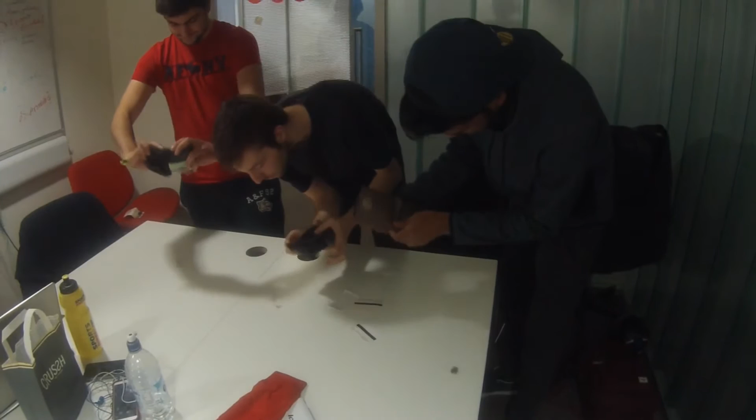Are you worried about global warming? Concerned about power outages? Struggling to pay bills? Or do you just like staring at spinning things? Nine Wind has the right solution for you.

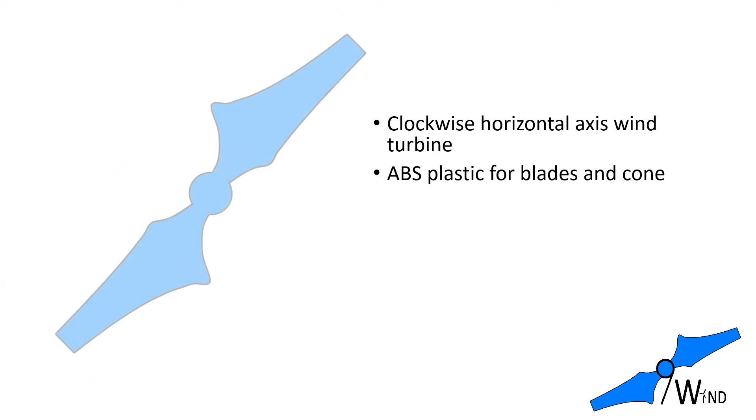Our company designs and manufactures excellent quality small horizontal axis wind turbines with very particular design limits. The turbine is made out of ABS plastic for blades and cone and aluminium for the hub. It rotates clockwise, its diameter cannot exceed 400 mm and the mass is kept below 400 grams.

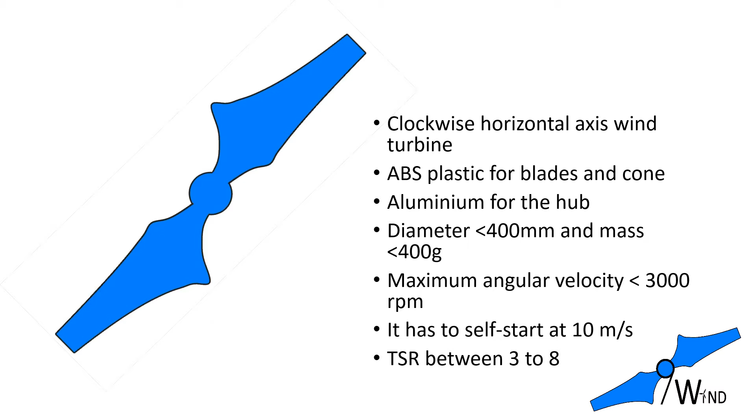Its maximum angular velocity should not exceed 3000 rpm. It has to self-start at 10 meters per second and should reach the maximum power coefficient, which is the ratio of power delivered by the turbine to maximum available power, at tip speed ratio between 3 and 8.

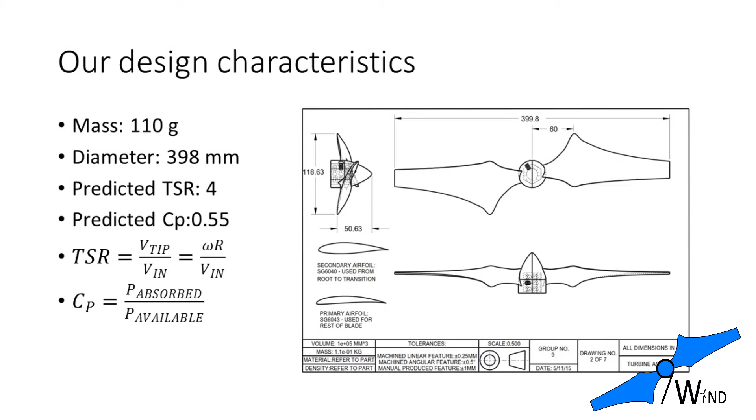Our design process focused on aerodynamic properties of the turbine first. Our engineers started by researching available literature to develop the preliminary design taking into account appropriate airfoil profiles, chord and twist distribution, and cone shape. Simulations were run in XFoil and QBlade in order to fine-tune the initial ideas to specific design requirements.

After intensive research, we settled for two airfoil profiles, SG6043 and SG6040, very popular choices for small wind turbines. The former provides good lift-to-drag ratio, while the latter ensures good structural properties near the root of the wing. The optimal transition point was found to be at approximately 6 centimeters from the root.

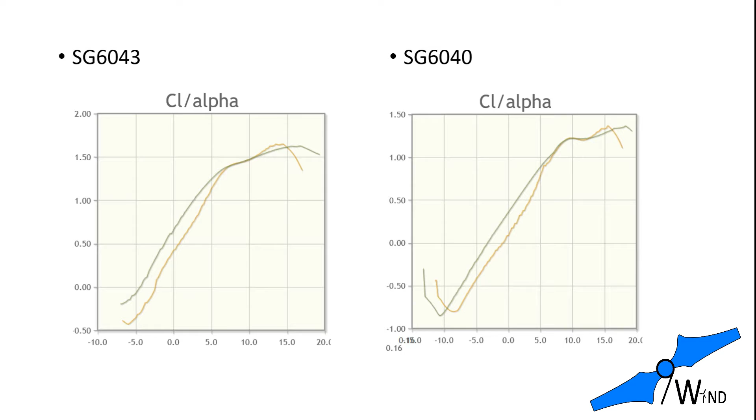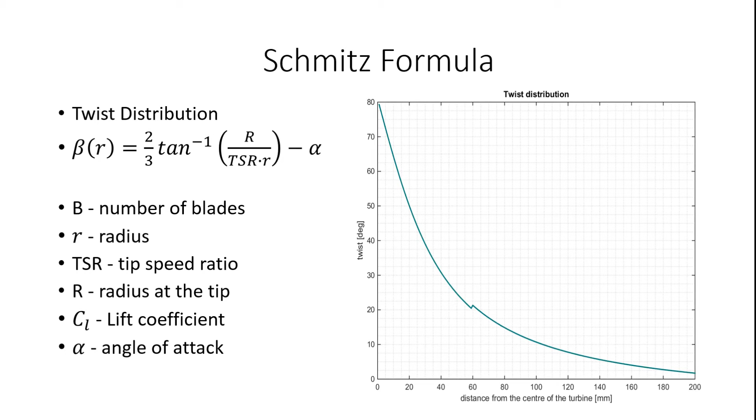Angles of attack were chosen to be 7.75 and 9 degrees respectively, in order to produce as much lift as possible without stalling. The variation of chord along the wing was calculated using the Betz approach, while the twist of the wing was calculated using the Schmitz approach to ensure the optimal angle of attack was maintained along the blade.

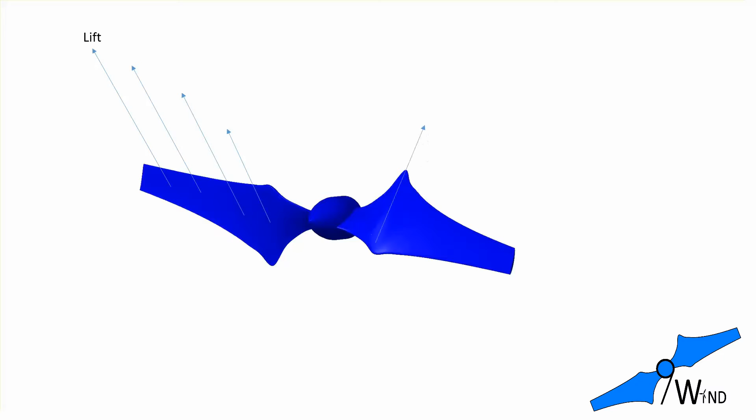Finally, we designed the shape of the cone using the optimum fineness ratio. The aim here was to ensure the flow leads smoothly without reducing the lift near the root. After this stage, analysis of structural properties is required. We must take into account the loads associated with centrifugal force, lift and drag. We then compare the resulting stresses with the ultimate tensile strength of ABS plastic.

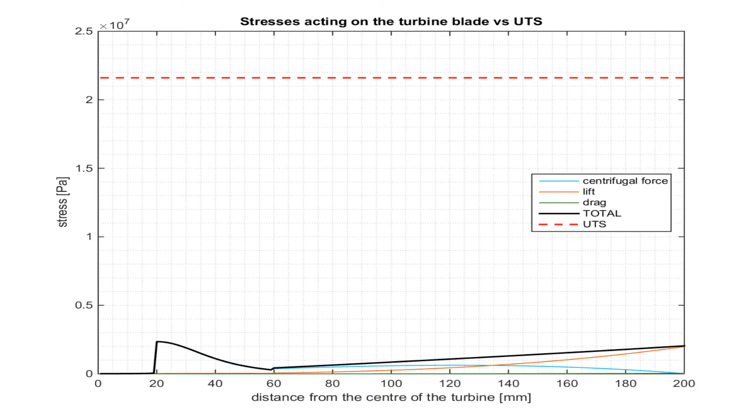A structural analysis was carried out in order to determine whether the blades would withstand the aerodynamic loads. The blade was discretized into 200 smaller pieces, for which lift, drag and centrifugal force were calculated using a MATLAB script. The resulting stresses were then compared with the ultimate tensile strength of ABS plastic. We found that the combined stresses didn't exceed 11% of the ultimate tensile strength at any point of the blade.

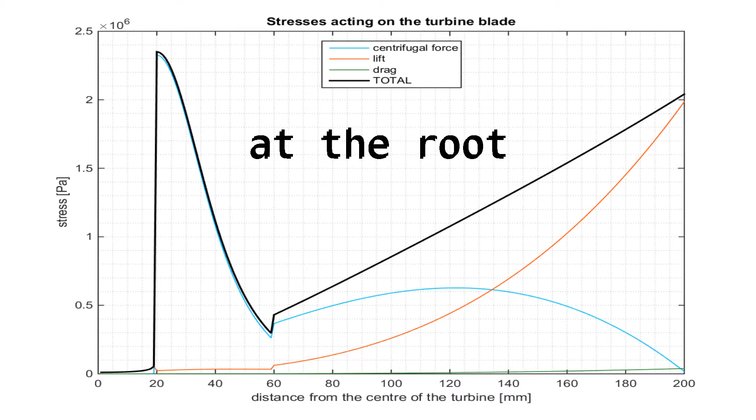The highest stresses due to the centrifugal force occurred at the root, while the highest stresses due to lift were found to occur at the tip. Satisfied with this result, we carried on to analyze the maximum possible deflection at the tip of the blade. The blade was again discretized into 200 smaller pieces, and using engineering beam theory we found that the maximum possible deflection was 1.6 mm, which was really reasonable.

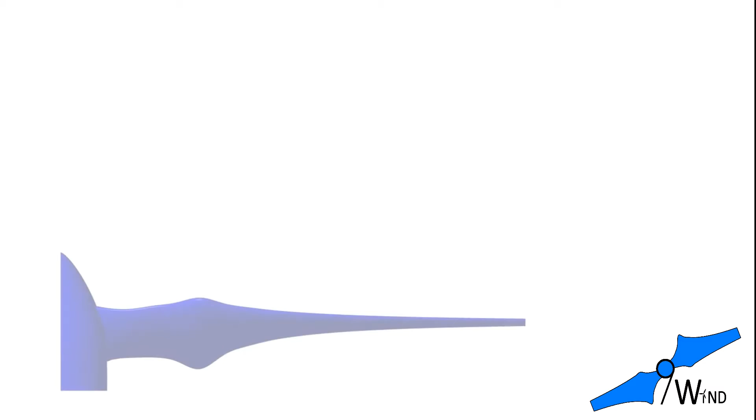The blade was idealized as a simple beam fixed at one end and free at the other. The polygon area formula was then used as a function of chord length and airfoil profile to estimate the cross-sectional areas across the 200 sections of the idealized blade. This enabled us to model the beam's flexural stiffness, EI, as a function of the chord length.

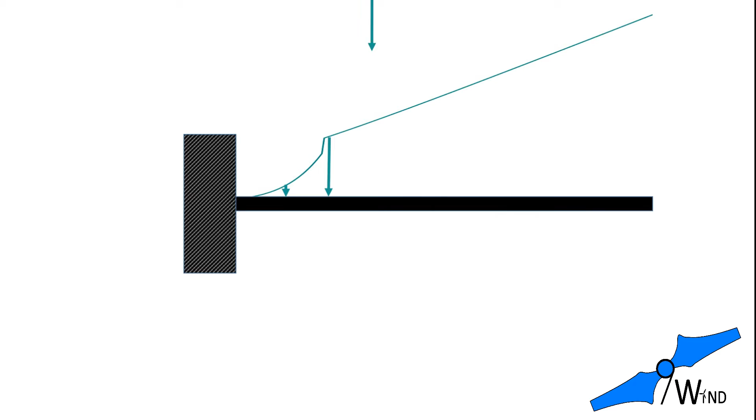After that, the lift, drag and centrifugal force distributions and approximations provided by the aerodynamics department were used by the structures department to find and analyze the bending moment and displacement distributions. This was done in parallel to a Creo simulation for comparison and verification.

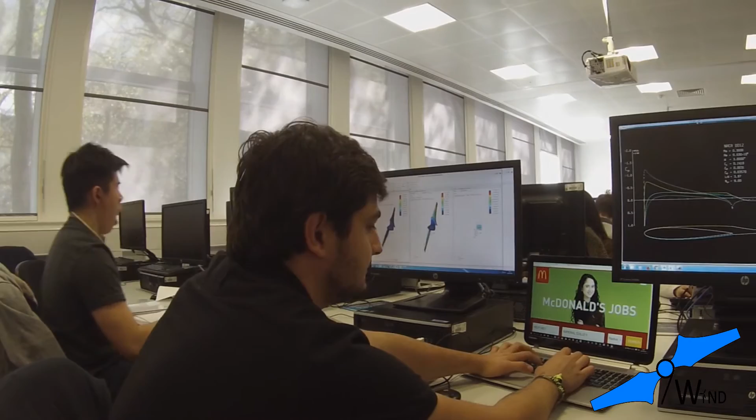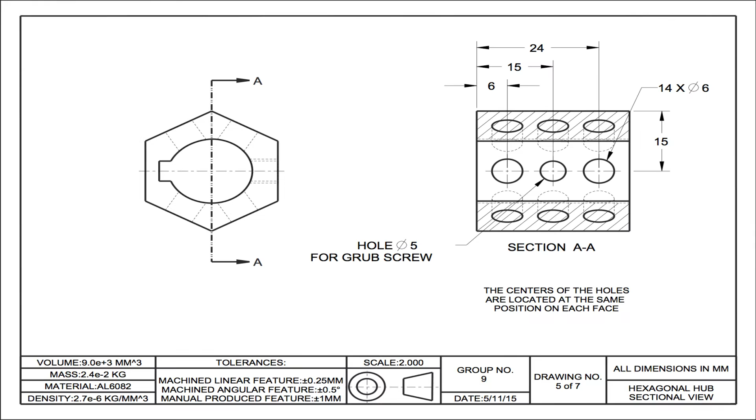For the aluminium hub, we decided to go for a hexagonal shape with a slight interference fit to make sure it stays in place. As aluminium is a relatively strong material, our main consideration was reducing the mass. In order to do so, the hub was designed with 14 holes on its faces. Of course, we also had to make sure that the design fits the test rig described in the project brief.

The turbine concept was then made into a CAD model using Creo Parametric. After checking the possibility of manufacture with the workshop, we decided to add some additional material at the trailing edge of the blades, so that the 3D printer doesn't have problems printing the sharp edge.

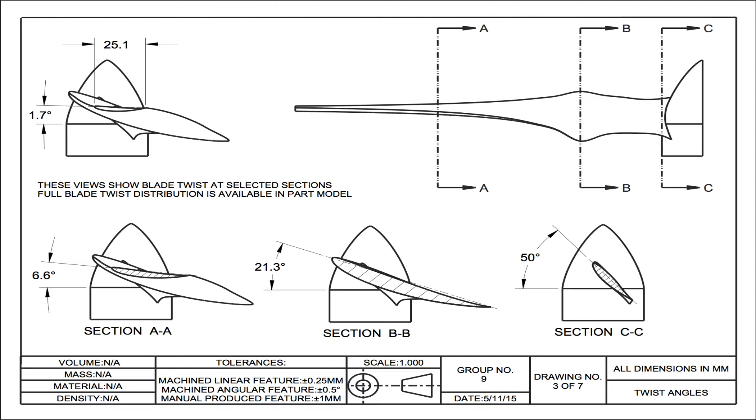The CAD model was then sent to the workshop, along with drawings for the manufacture of the hub. The expected weight of the turbine was 110 grams. In order to manufacture the aluminium hub, a cylindrical piece was smoothened at its face and reduced in diameter using a lathe.

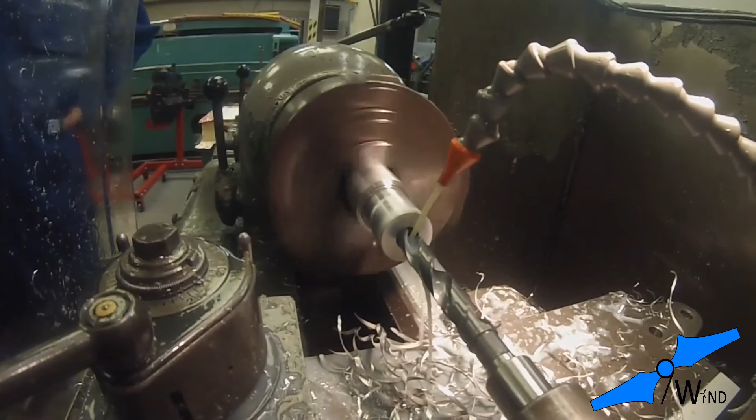This gave a generic shape to work down into our hexagonal design. The central hole was drilled along the center line of the cylinder, gradually increasing its diameter and making sure it matched the tolerance of the shaft. The piece was then cut to size and taken to our milling machine, where the outer side of the cylinder was cut into a hexagon.

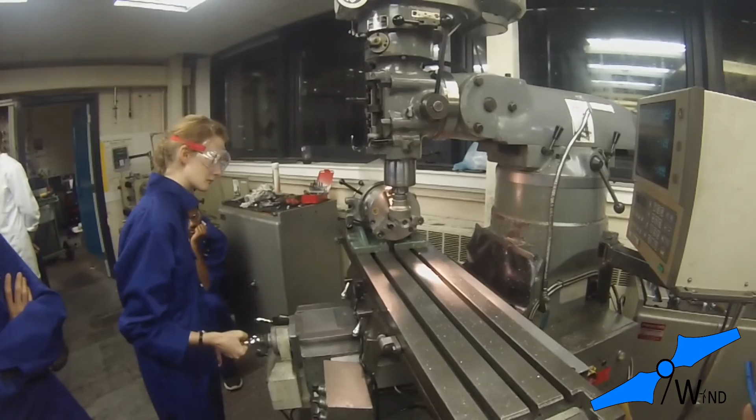Having obtained our desired design, some weight-reducing holes were drilled into the hub. Finally, we threaded in the grub screw hole and added the keyway needed to attach the turbine to the testing rig. The blades and the cone, however, were 3D printed in blue ABS plastic.

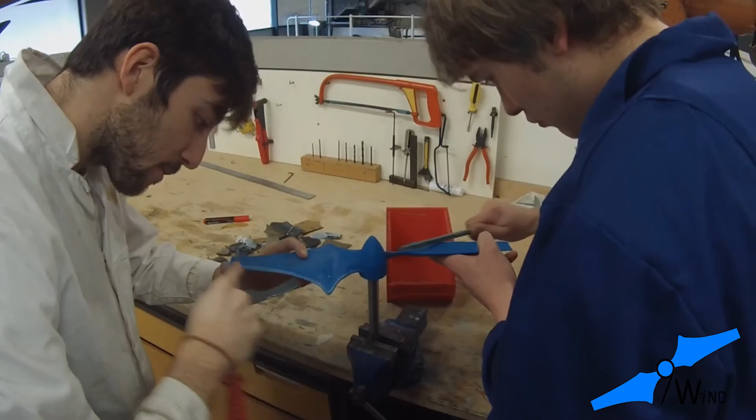We had to get rid of some excess material on the trailing edges and level off the originally rough surface. Sanding down the trailing edge proved to be quite a challenge and required a lot of work. However, we were rather pleased with the final result. The surface of the blades and the cone was gradually smoothed down using finer and finer grained sandpaper to ensure the attached airflow over the turbine. This would prevent turbulence, which would make the performance worse.

The Donald Campbell wind tunnel. When our product was ready for testing, it was transported to the Donald Campbell wind tunnel at Imperial College London, where it was reweighed and remeasured for accuracy. The testing rig at Imperial College was made up of a 16mm diameter shaft connected to a torque transducer and hydraulic brake. The objective was to generate as much power as possible at wind speeds of 6, 8, 10 and 12 meters per second, and have the turbine self-start at 10 meters per second.

The wind speed in the tunnel was brought up to around 15 meters per second, and after giving it a push, the wind turbine finally started. The speed was brought down to 8 meters per second, and up to 10 meters per second and 12 meters per second. After realizing that our turbine resisted stall, we took the speed down to 6 meters per second and managed to get some power out of it, around 1.5 watts.

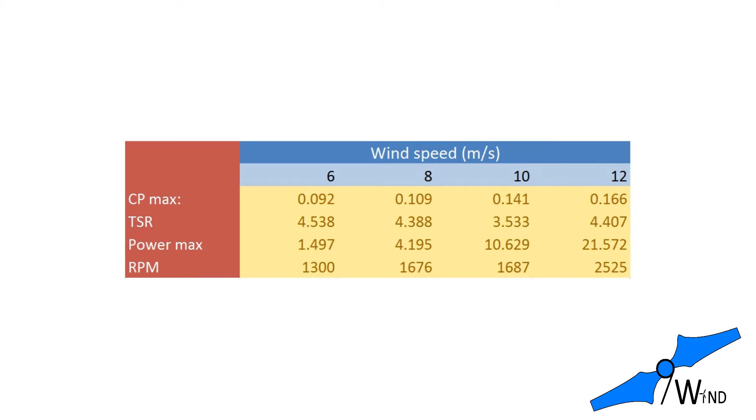After that, we attempted to capture the actual self-start speed and found that it started at around 17 to 18 meters per second. The summarized testing results are presented in the table along with the power curves. Even though the turbine managed to produce a maximum power of 20 watts at the highest wind speed, the results did not entirely match our predictions. We expected the maximum CP to be around 0.55 as compared to the actual maximum of 0.17.

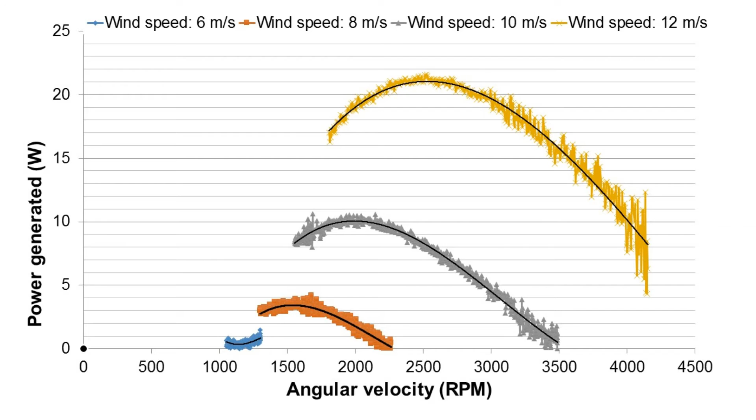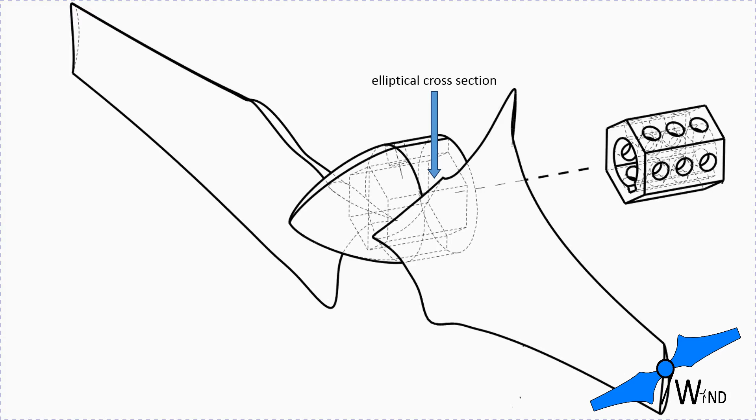Being an ambitious company, we always strive for improvement of our products. Following the testing, we identified key areas which would improve the performance of our wind turbine, eliminating theoretical infinite stresses and strengthening the root by introducing an elliptical blade cross-section at the root and blending the blade with the cone. Our results showed that making an aerodynamic and power-efficient small wind turbine required either a third blade or some sort of self-starting mechanism, as average wind speeds in our studied target locations were nowhere near that required to self-start.

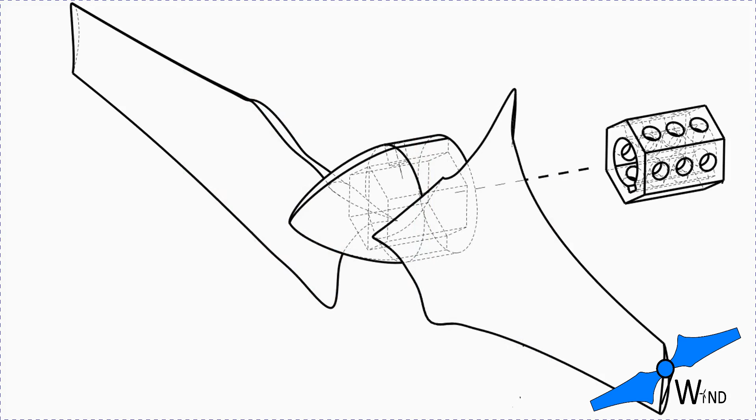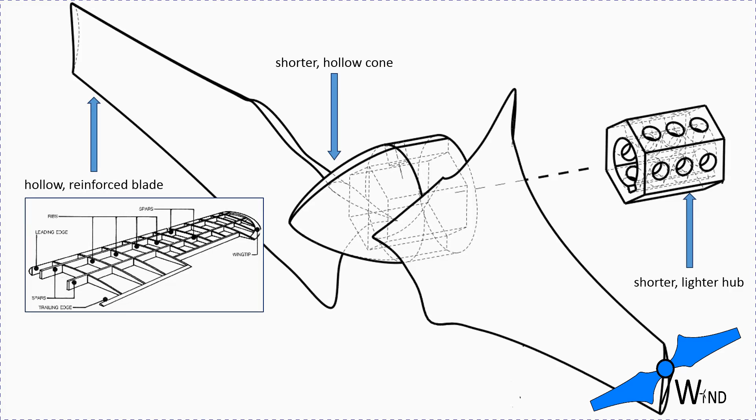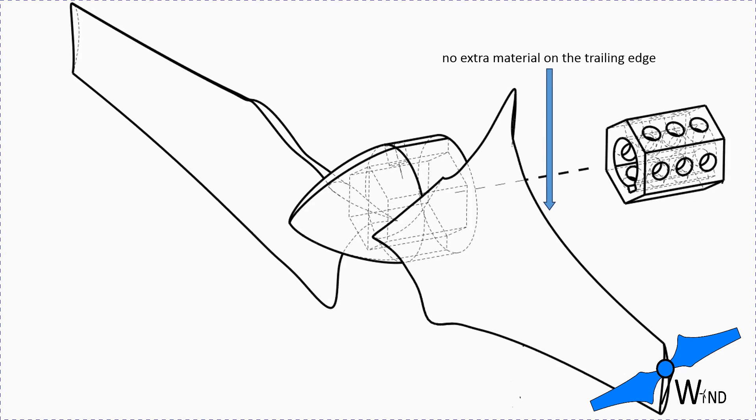Turbine efficiency could have been increased by reducing its mass by designing a shorter and lighter hub in addition to a shorter and hollowed out cone. Also, having a hollow blade with internal vanes that withstand stresses throughout the blade could have provided an equally strong but much lighter turbine. Making full use of the current capabilities of 3D printers and removing the extra material from the trailing edge could have given us more time to smoothen the surface of the blade and the cone. Also, a layer of paint could have been applied before testing. We also believe that a larger diameter would have allowed the blade to self-start.

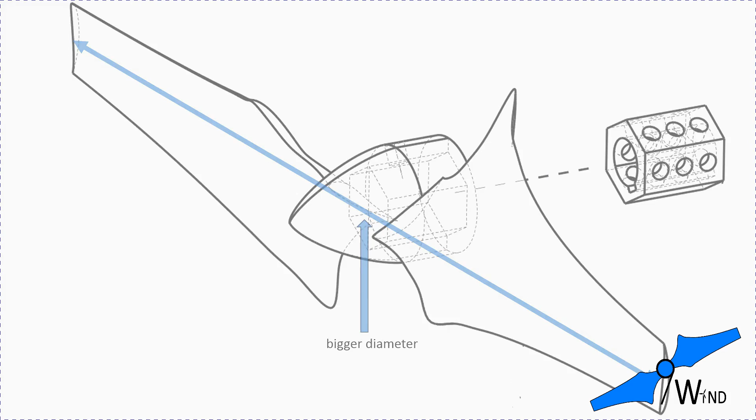In short, our turbine is ideal for households in rather windy areas, although you might need to give it a bit of a push. It can power equipment such as 2 routers, a DVD recorder, 2 table fans, or a PS4 on standby. Contact our offices in London, Rome, Warsaw, and Damascus, and say goodbye to power outages and enormous electricity bills.